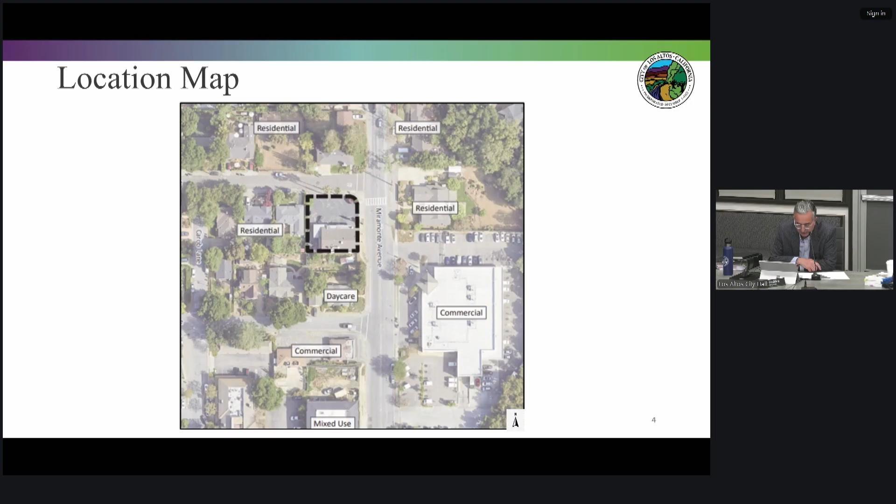The project site is approximately 0.2 acres located on the southwest corner of Lorraine Avenue and Miramonte Avenue. The site is currently developed with a 2,240 square foot single-story commercial building with landscaping and 11 surface parking spaces. The project proposes to demolish the existing commercial building and construct a 17,674 square foot mixed-use building, providing 962 square feet of commercial space with 12 residential units on the upper floors. On-site parking is provided at grade with 16 spaces, including 12 for residents and 4 for the commercial use.

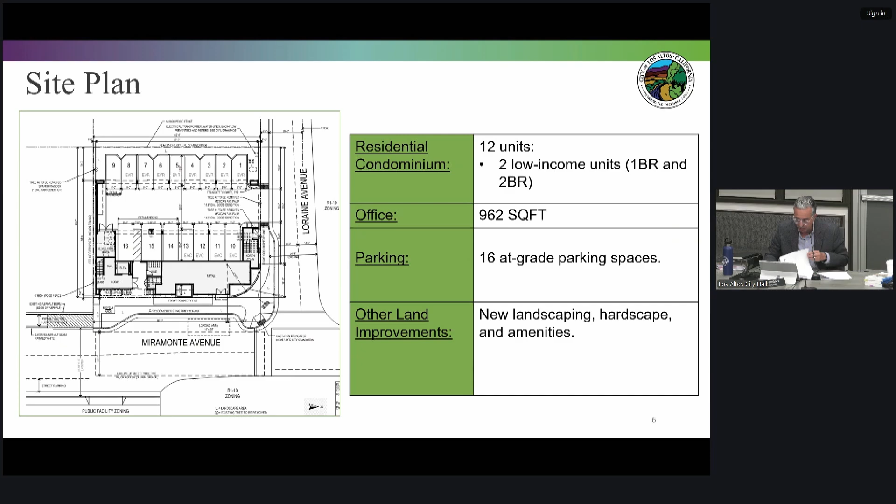The site provides pedestrian access from Miramonte and Lorraine Avenues with separate entries for residential and commercial uses, and vehicular access from Lorraine Avenue. 16 at-grade parking spaces are provided, including 8 EV-ready and 4 with active charging. Landscaping includes new trees, shrubs, and permeable pavers along both frontages with crepe myrtles, Chinese pistache, and western redbuds. Three non-protected trees will be removed and four adjacent trees preserved. The 1,824 square foot rooftop terrace features ornamental olive trees, drought-tolerant landscaping, seating areas, and a fire pit.

The project aligns with the general plan policies. It complies with the zoning standards for the CN district and the city's objective design control standards, except where modifications were made under the density bonus state law. The neighborhood designation has no set density, so the base density was calculated for a fully compliant project at 39 units per acre, or 8 dwelling units. With 2 low-income units, the project qualifies for a 50% density bonus under Government Code 65915, allowing for 4 additional units, or a total of 12 units. The density bonus report confirms compliance with state and local requirements. One concession under the ordinance allows an increase in building height from 30 feet to approximately 41 feet, and 7 waivers are requested as stated in the staff report.

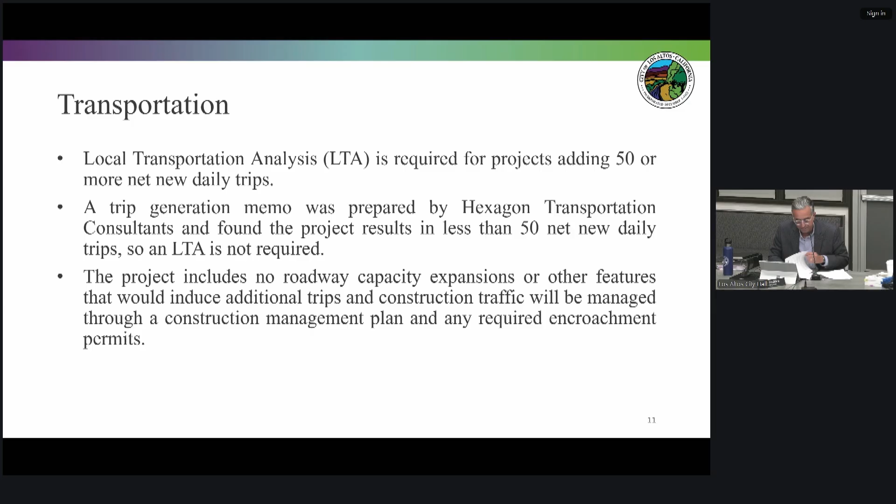It would be assigned in the planning division section, I believe. Engineering, sorry.

Staff recommends approval of the project consistent with the recommended motion. Upon commission approval, the vesting tentative map will be forwarded to council for consideration. This concludes staff's presentation. Unless there are any questions, thank you.

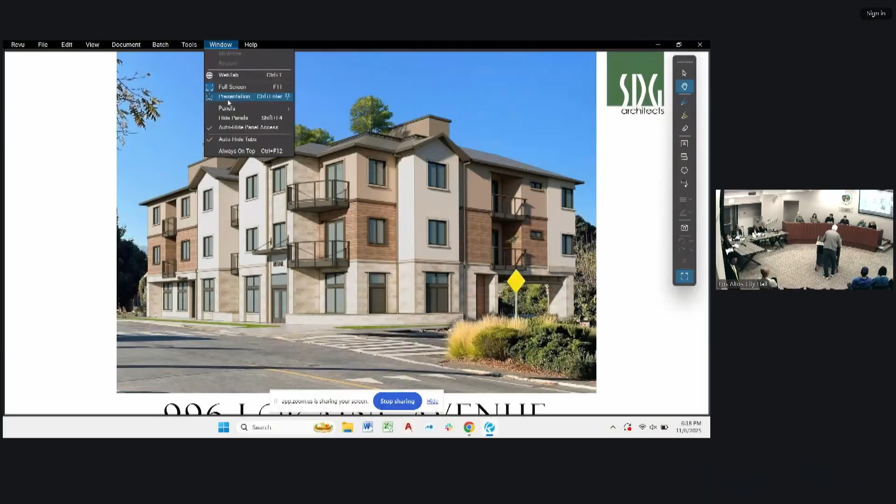Good evening. My name is Brent Randall with SDG Architects. It's been a pleasure working with Sean Gallegos as the city planner on this project. Because of his thorough presentation introducing this, my main focus will be on how this project fits in with the neighborhood and the benefits that it provides. Can we start the clock? Thank you. Okay, I hope I'm talking loud enough.

So Sean already introduced the project site to you. This just gives an overview of how Miramonte really is the main road that will be used to access the site as it comes to getting off of Foothill Expressway and getting onto it using A Street. So we do not anticipate the traffic for this project going through the neighborhood, but rather staying on Miramonte.

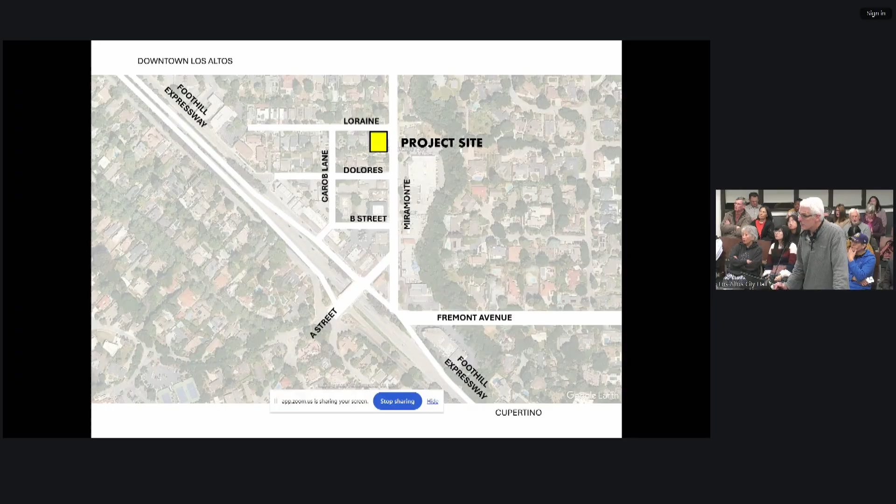So this gives a diagrammatic circulation for the site. Probably one of the biggest benefits that this project provides to the immediate neighborhood is cleaning up the sidewalk condition and the walkways to cross over Miramonte Avenue and Lorraine Avenue.

This parcel is kind of sandwiched between parcels that are in process with becoming what the road width is going to be, but isn't there just yet. So you can see that at the corner of Miramonte Avenue and Lorraine, there's a bulb-out that provides an accessible ramp and a walkway that will get you over to the other side on Miramonte. That will be a great improvement, as well as the other one that takes you across the street to 1491 Miramonte.

This parcel is the last one that's connected with the commercial neighborhood zone before it turns completely into residential. The property to the south, 991 Dolores, is actually a Montessori school, designated commercial. And then there's a house above it to the west, 982 Lorraine.

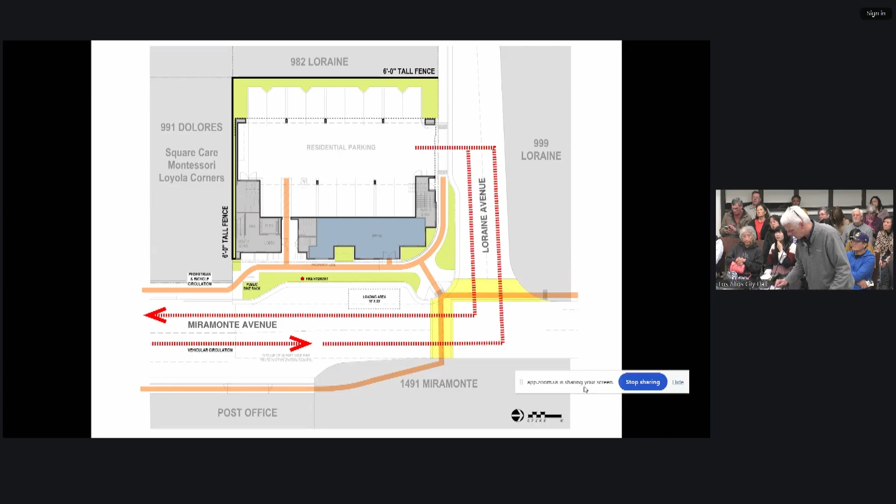What's going on here? Okay. So I just wanted to highlight some of the attributes of the building itself.

The city municipal code requires that the building have an identifiable base, middle, and top. This building provides a stone veneer with precast glass, called GFRC, glass fiber reinforced concrete trim, that will offer a very smooth finish and cap off the stone. Then on the second floor, we provided a wood-looking siding that should provide some nice earth tones that would blend in with the residential. And then on the top, we have the mansard roof and the gables to express residential character.

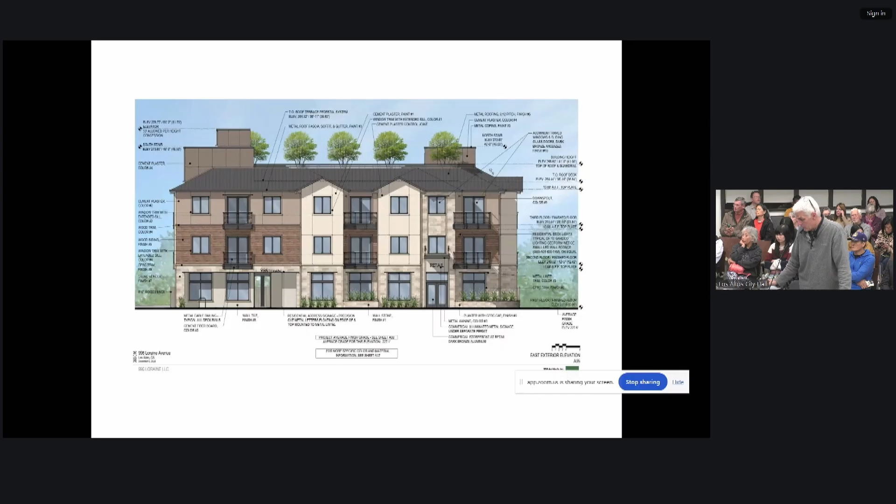Okay, then along Lorraine, that's where we have the entrance into the parking garage. This one, we just wanted to highlight that we have a 20-foot buffer between the building and the adjacent residential property. And then up on the roof, I don't know if you guys can see this arrow, but the roof terrace actually starts at this point. So it's close to 40 feet away from the property line.

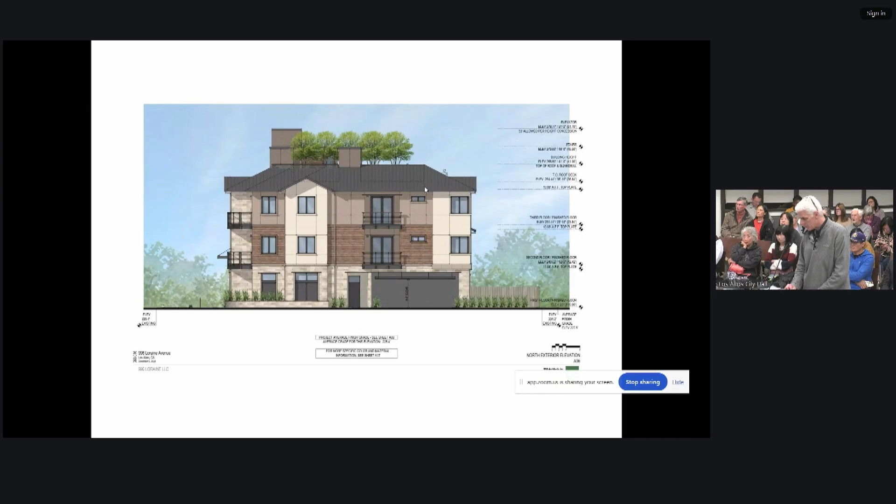And I wanted to address potential concerns with the roof terrace. A lot of effort was put into designing it so that we would minimize its presence and intrusion onto the neighborhood properties. We specifically tucked it into the mansard roof so that it has a solid wall that surrounds it.

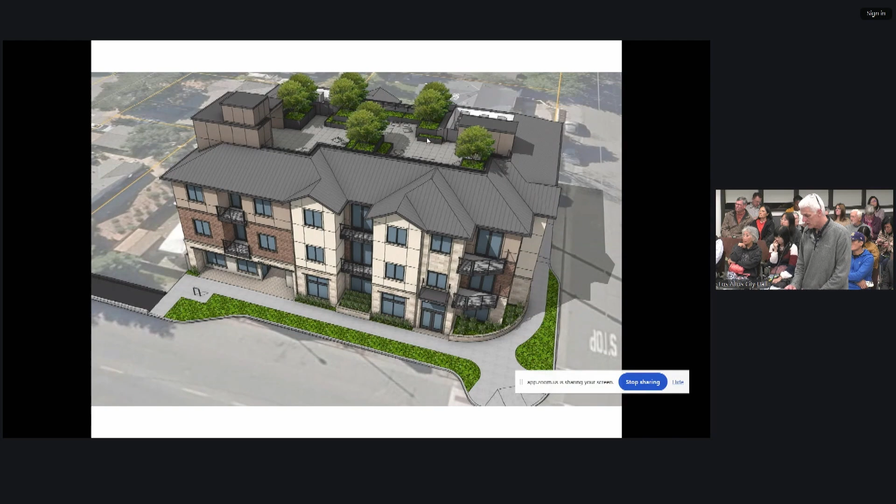In addition to that, we made sure that where we have the elevator and stair on the south, we enclosed the door area so that opening and closing, there would be no perception of that to adjacent properties. And we also used the stair tower on the north side to help shield the neighborhood from the roof terrace.

You can see with that red outline on your left, the south stair and the elevator. That provides a solid wall there. Then we use the mechanical wells and the roof and green planters extensively to further push the activities of the roof terrace away from the edge to provide privacy.

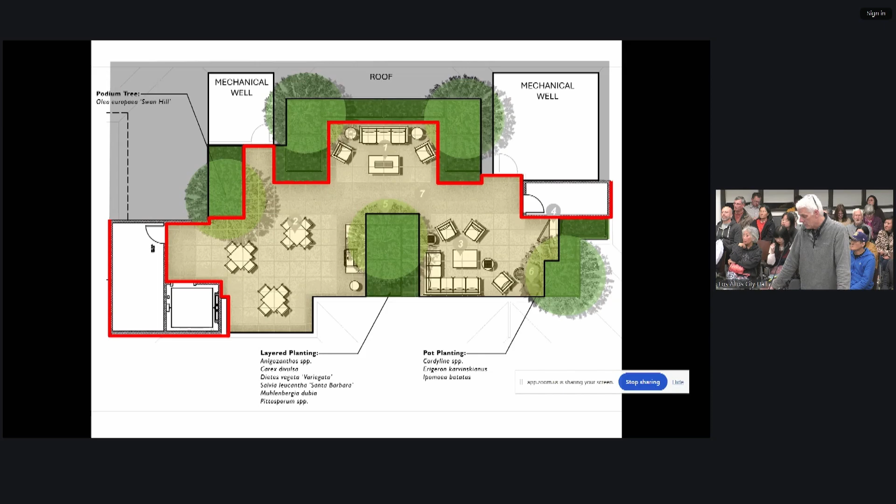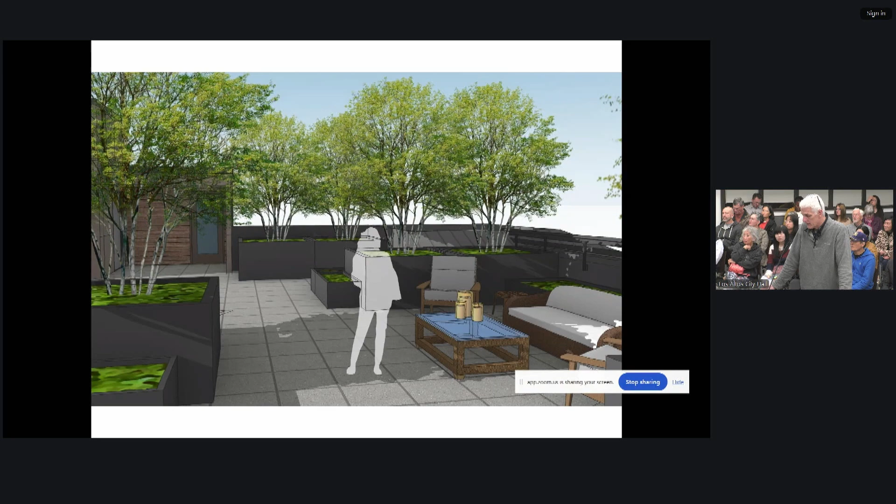And then one more: this is a view from the roof terrace looking toward the south stair, and the elevator would be all the way over on the left. You can see here the intention is that the landscaping, planters, trees, and bushes will make it a very private space and very disconnected from the adjacent parcel, so that both properties will have privacy.

So thank you for this chance to present the project, and I look forward to answering any questions.

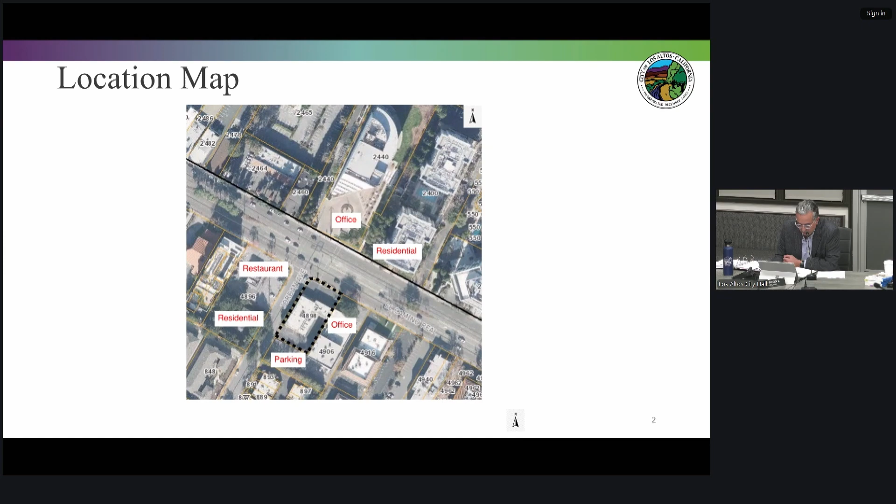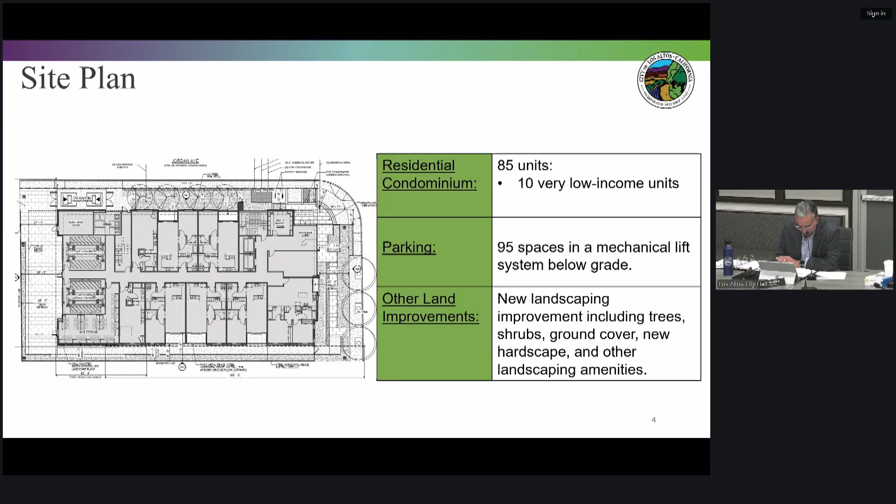The project proposes to construct an 8-story multifamily residential building with 85 dwelling units. Vehicle access to the fully underground automated parking garage is provided from Jordan Avenue. The garage will accommodate 95 vehicle spaces, including electric vehicle charging stations, along with long-term and short-term bicycle parking. The project also provides a landscaped roof deck, ground floor pedestrian amenities, and streetscape improvements along both El Camino Real and Jordan Avenue, including new sidewalks, planters, and street trees.

The residential mix includes a studio, 1-bedroom, 2-bedroom, and 3-bedroom units.

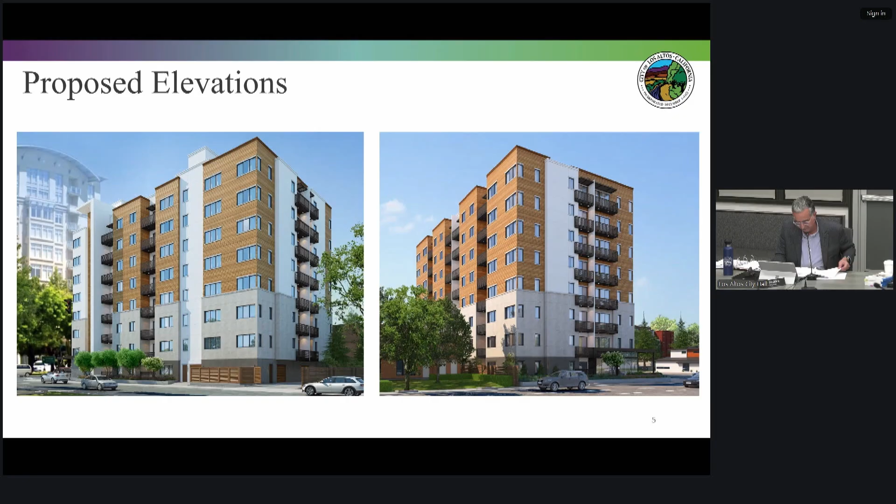The site provides pedestrian access from El Camino Real and Jordan Avenue, with main residential entries at the corner of El Camino Real, secondary access from Jordan exiting from a stairwell, and an entrance along the rear driveway entering the building adjacent to the parking spaces. Vehicle access to the underground automated garage is from Jordan, including 95 spaces, 12 EV-ready and 6 active charging stalls, plus bicycle parking.

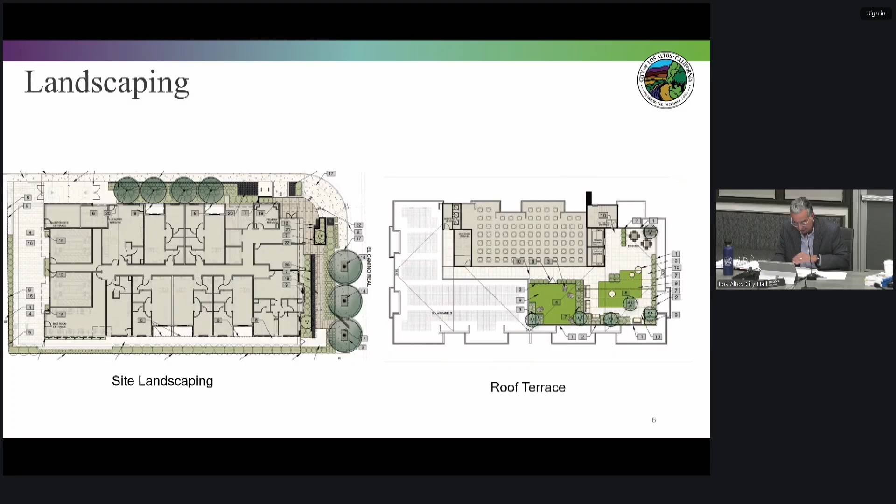Landscape features include ornamental shrubs and new trees, 3 Chinese pistache along El Camino and 4 ginkgo along Jordan Avenue. The 2,720 square foot rooftop deck offers landscape amenity spaces with golden spirit smoke trees, drought-tolerant plantings, seating, and shaded gathering areas. The project aligns with the general plan policies, complies with the zoning standards of the CT district, and the city's objective design control standards.

The thoroughfare commercial CT designation has no fixed residential density, so the base density was calculated for a fully compliant project at 50 units per acre, or 50 units on the project site. With 10 very low income units, 20% of the base, the project qualified for a 50% density bonus, adding 25 units. An additional 20% density bonus was provided for exceeding affordability requirements, adding 10 more units, for a total of 85 units. The density report confirms compliance with state and local requirements and includes the requested waivers.

No concessions are requested at this time. 16 waivers are proposed to modify standards that would otherwise preclude the project, allowing the full permitted density and efficient inclusion of affordable units.

The project is expected to generate a local transportation analysis, completed because the project exceeds 50 net new daily trips under the city's VMT policy.

My little thing that I prepared is wrong. I don't know—a transportation analysis was determined, and the applicant can speak to that, I'm sorry.

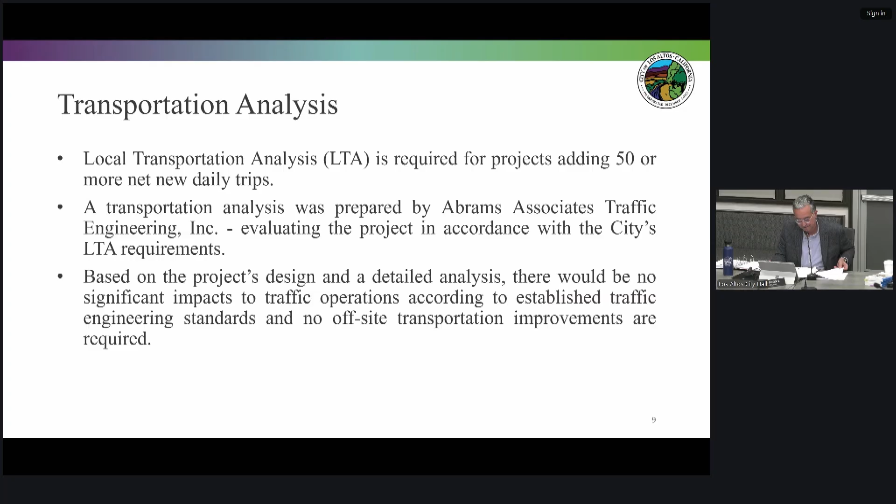Based on the project design and detailed analysis, there would be no significant impacts on traffic operations according to established traffic engineering standards, and no off-site transportation improvements are required. Staff recommends approval of the project consistent with the recommended motion. Upon commission approval, the vesting tentative parcel map application will be moved forward to council for consideration. This concludes staff's presentation.

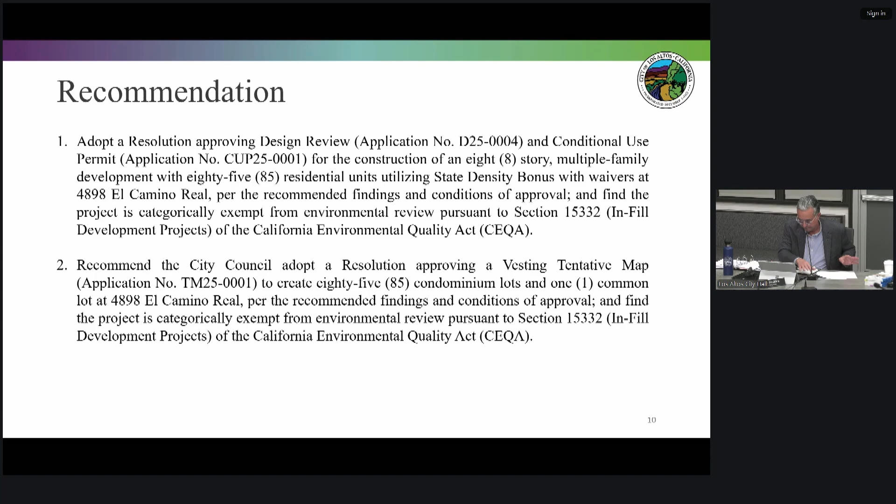Thank you. Do you need help connecting to display something? Sean, I don't know what the process is for them connecting. They do connect to Zoom or something. It should pop up. Is my screen visible? Is it on? Oh, it's on. Great, well, no, it's not presenting yet. It says I'm sharing my screen here. Oh, it just takes a little while.

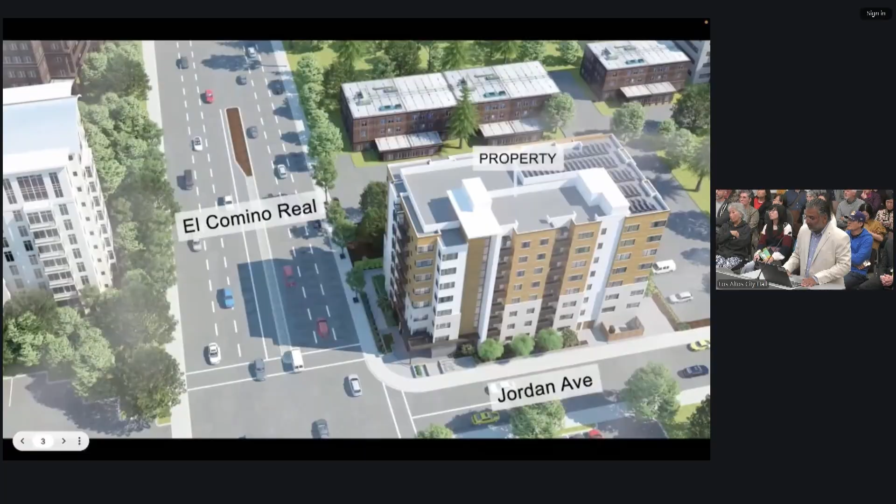Here's a quick overview of the project. The project as proposed is going to be 2 stories shorter than the building right across the street, the Avalon Apartments. I have known people who have lived there. They're beautiful apartments, and our units are units that Los Altos community and residents would be proud to live in, with respect to the spaciousness of those units—studios, 1 bedrooms and 2 bedrooms—as planned.

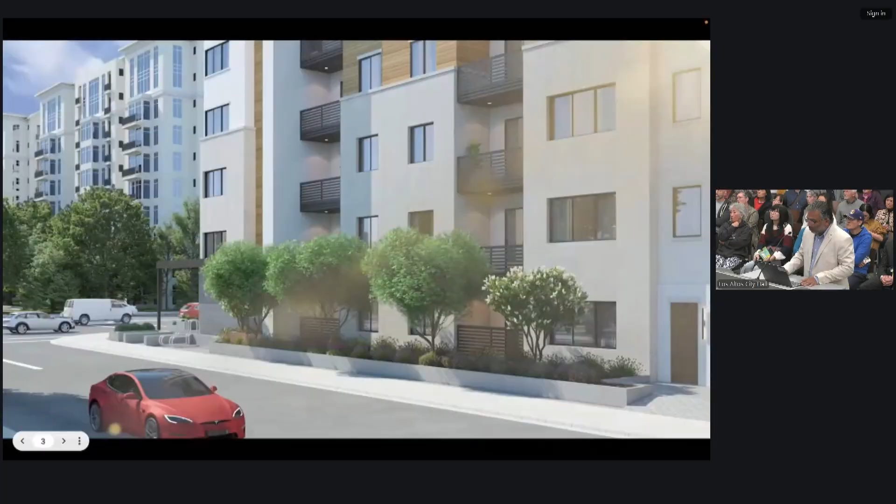As staff already pointed out, there are a lot of improvements to the sidewalk and other features being planned. But I'm going to talk a little bit about the automated puzzle parking system, which is a state-of-the-art system that will support 95 spots, even though in this project we were by code required to provide nothing. But I believe it is the right thing to do. It's designed for 3.2 times the peak load capacity when both elevators are working, and 1.6 times when just one of them is working during maintenance.

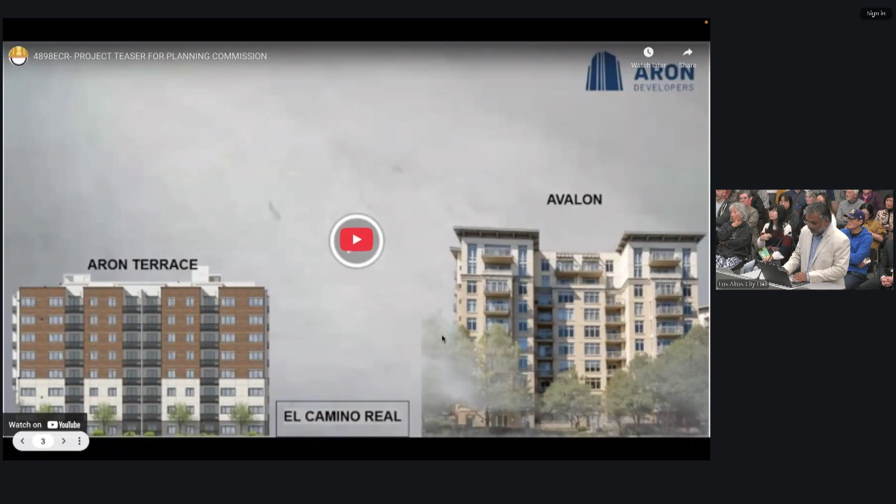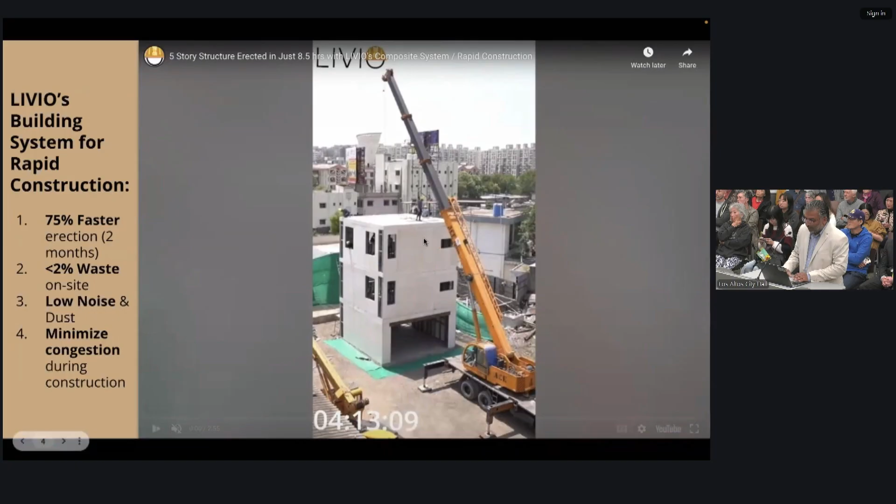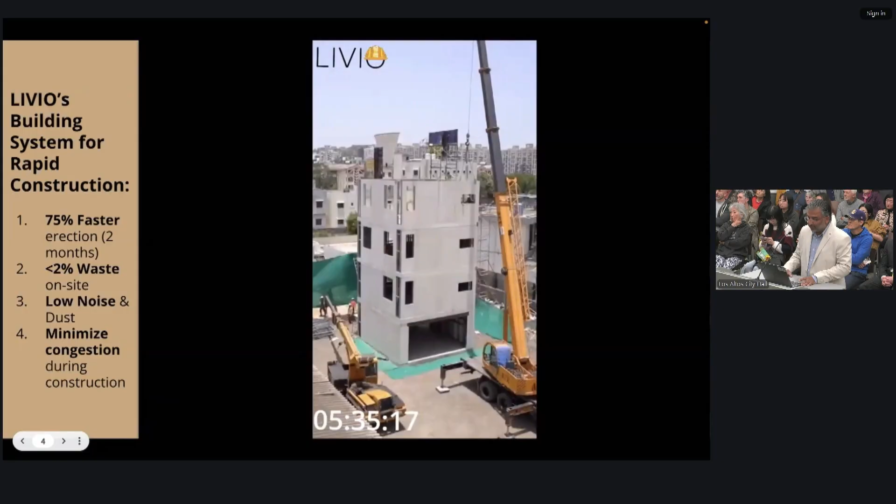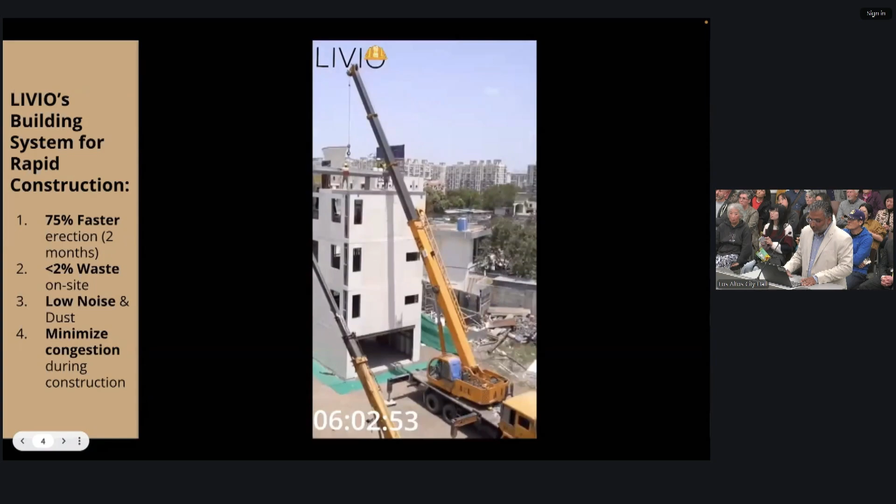I also want to talk about our building methodology. We would be building using Livio's building system for rapid construction. These are pre-assembled building panels, which enable 75% faster construction in framing, plumbing, electrical, insulation, interior sheathing, exterior elements, rigid insulation, waterproofing, and finished facade systems, while reducing waste dramatically. It also reduces congestion because they are just-in-time delivered.

In this case, what you're seeing is a 5-story building going up in 8 hours. In our case, we expect our project to be erected in 2 months—the whole vertical construction in 2 months—and then the finishing to continue after that.

Incorporating BMR units is a key part of our projects and furthers the goal of cities' RHNA objectives and commitments. As part of that, 10 BMR units are well dispersed across all unit types—2 bedrooms, 1 bedrooms, and studios—and also on all floors.

Some of the other things taken into account include a well thought through trash pickup system. Each floor has chutes, and we've reviewed with Mission Trail and their staff for deliverability, sitting in their offices deliberating, planning, and improving it based on that so far. Also, how mail would be delivered by USPS and other agencies—there are allocations for that.

In the back of the building, right over here, there are 2 parallel, completely redundant puzzle parking elevators, where only one was sufficient from a technical capability perspective. Even then, we would have had 1.6 times the capacity of parking. But with these 2, we built redundancy for maintenance and so on.

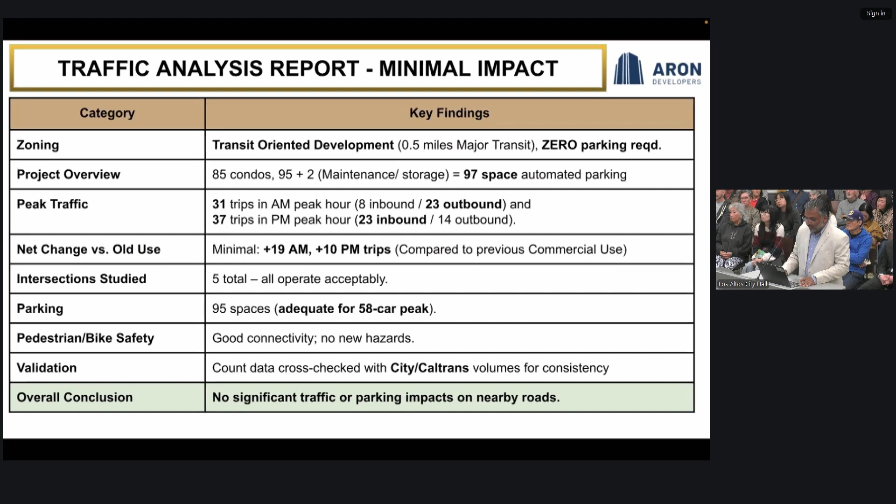If we could please have my consultant Max speak on the automated puzzle system. They're not present—are they allowed to speak remotely? No. Zoom? You have to be present. Okay, I'll talk on his behalf then.

We're very excited about the automated puzzle parking system we're putting in. It's a really state-of-the-art learning system. Let me start with a couple of highlights. We are putting in 2 parallel redundant bays, and one would have been completely sufficient.

The demand per the traffic report is 23 cars per hour. However, with both bays and both elevators perfectly working, we would be able to handle 74 cars per hour, which is 3.2 times the demand. And with one elevator down for maintenance or any other activity, 37 cars per hour, or 1.6 times the demand, would still be available.

For system uptime efficiency, the consultant and parking company we're working with have an efficiency of 99.19% uptime. The average retrieval time is 180 seconds, best case 48 seconds, and the average parking time is also around 180 seconds and so on. So these are the figures they provide us.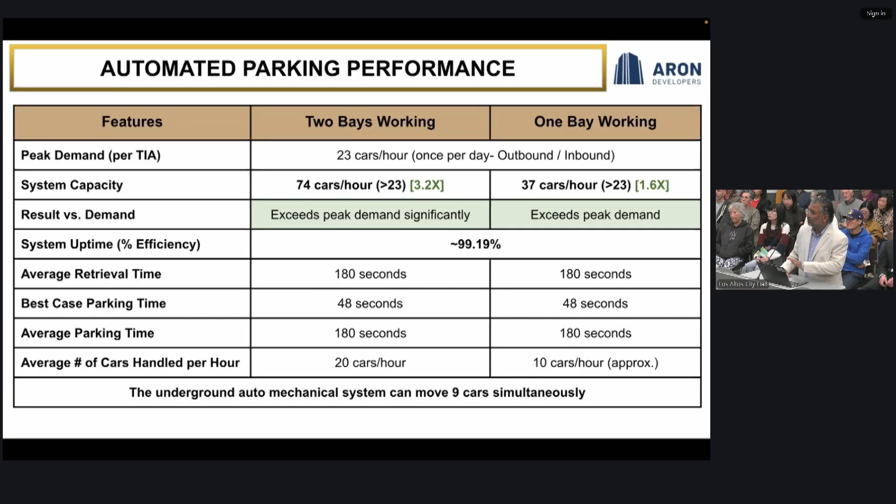This is a slide I wanted them to present because this is their actual data. I'm going to skip through it, but their actual numbers are actually much better. I'll skip through it for today.

Even though we believe that with such a highly advanced, efficient, redundant system there will be no issues—sorry, you're out of time, but you will have a 5-minute rebuttal period, so maybe you could pick up at that point.

Sure, if that's okay. I would leave the presentation. You can just leave it there. Thank you so much for the opportunity. I appreciate it. No problem.

All right, so we're going to go to questions for staff or the applicant. Any questions from anybody?

Go ahead. Yeah, I think what you had shown—if you could maybe go through that, because what I'm trying to figure out is what happens when there's 5 cars coming in and 5 cars leaving, and there's a UPS truck and an Amazon truck—what does that look like? And where are people waiting in the building, how are they lining up? I just need to know, on that map, how people are going to line up. Sure, I'm presenting—there it is.

So all systems, engineering systems, would be designed based on the demand. In this case, the total capacity available of the parking system is 74, which is basically a time of less than a minute per car. So even when we go to hotels and call valet, or pick out a car, it takes significantly more time than that.

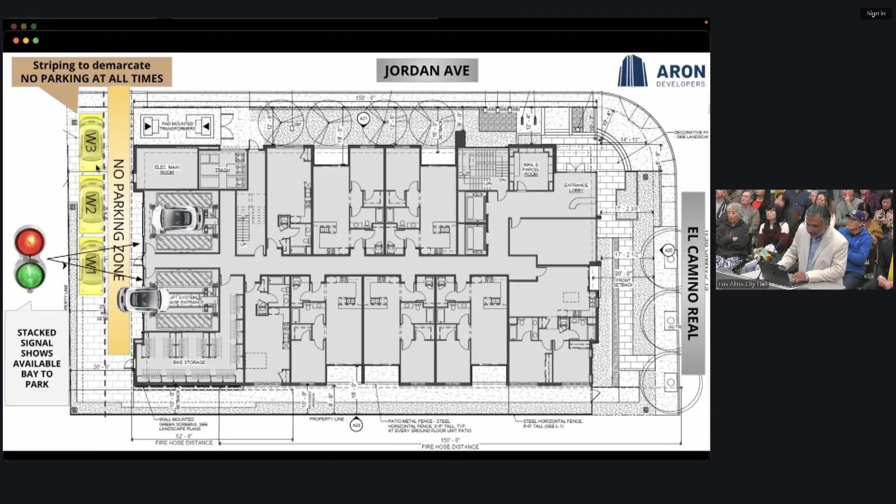Can you zoom at all? It may not be possible with the presentation software, but the 3 yellow spots—sorry to interrupt—that's where you would wait if an elevator were not available. Correct. All exiting cars will exit out this way. This is a no parking area, and all exiting cars will always exit out this way.

So if I lived in this building, if I walk down and go in that room where the tray is, I swipe something on an app, and then my car will be brought up. But then what if someone's coming in at the same time?

There are 2 ways to access the system. The first is a mobile app. You can be up in your room, taking a shower or whatever, and call the car, and it would come to you, ready for you to take out. You can also set a timer or an alarm, saying you want your car available at 6:37 a.m., and it would be available to you, facing outwards, at 6:37 a.m. in the bay. That's the first way to interact with the system.

And the second way to interact with the system would be through a kiosk, which would be available. You would go to the kiosk and press to retrieve your car. Essentially, there's a code, and you can retrieve your car.

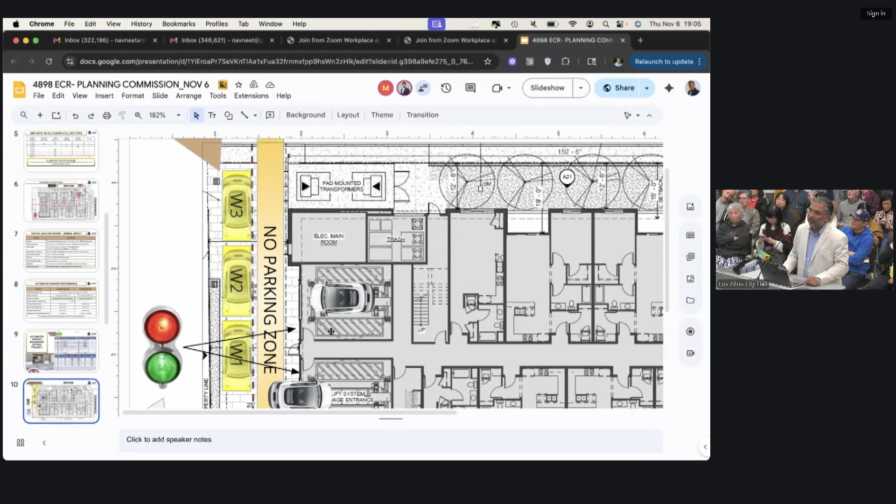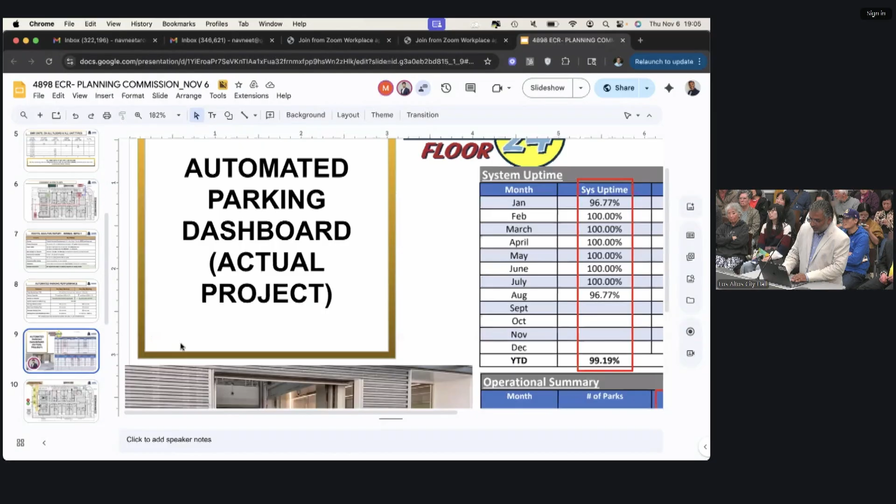Okay, one more question. If it takes 3 minutes to bring the car up once I scan the app—I thought I saw 180 seconds? Yes, that is correct. The marketing, conservative numbers given to us are 180 seconds. 180 is the average retrieval time. And the best case retrieval time is 48 seconds.

When both systems are working, the system is also a learning system. It knows that, say, Nav typically leaves early morning at 5 a.m. or typically leaves at 6 p.m. At any point, while cars are being parked in and going out, nine cars can be moved inside the system automatically, moved in a puzzle way to bring Nav's car, because he typically comes at 6:37 a.m. and needs it. So the system is learning, just like software systems, arranging the cars based on patterns it has, and based on patterns that people have explicitly set, like saying they like to go to work at 8:30 in the morning.

This is probably a stupid question, but what happens if something breaks in the system and you can't get your car out? No, it won't—that's why we have redundancy built into it.

To serve a building like this, most developers, to save money, would put in only one elevator, because from a capacity standpoint, even with one elevator, the system would have 1.6 times the capacity needed to serve the building based on all available data. However, just to cover the scenario of maintenance and downtime—because we all know elevators have downtimes—there is a parallel system. These are completely parallel systems, just like a hotel has 2 elevators and one can go down while you still use the other. Again, we'll be surpassing the capacity needs or demand of the building.

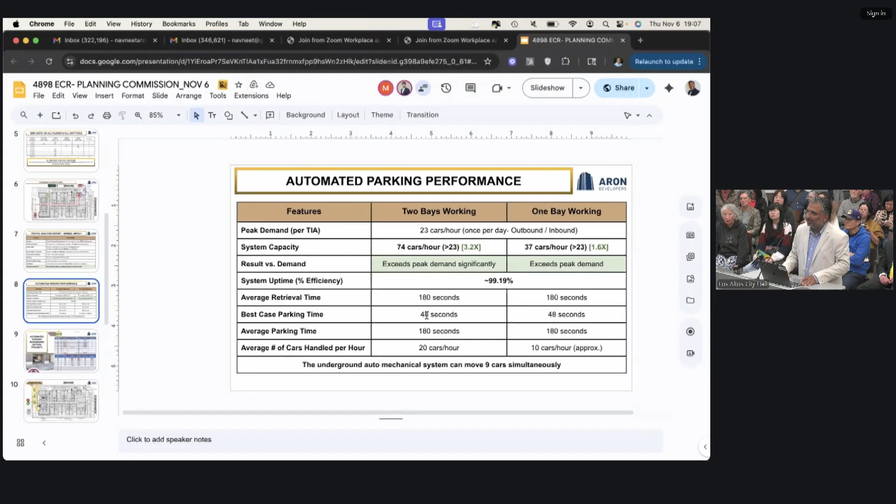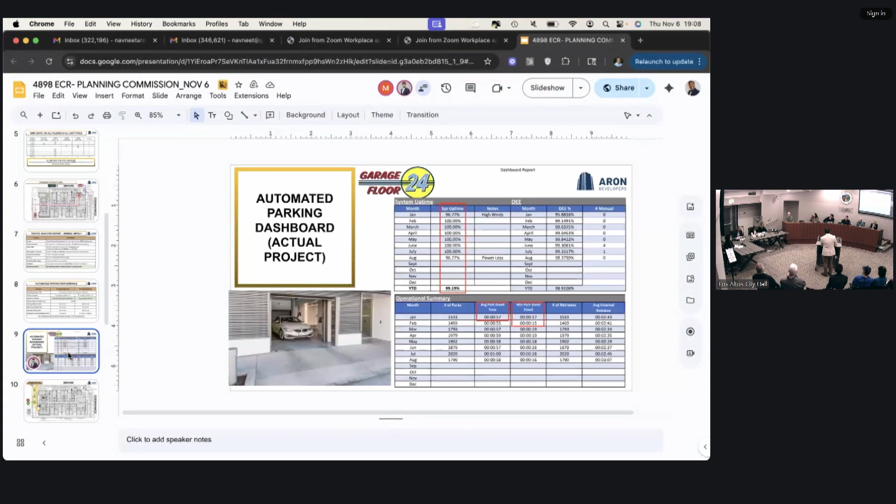I could also add, looking at the operations plan prepared for this site, it references auto cycle times—how quickly things can be moved. It indicates that park and grab on the same level is 62 seconds, park and grab at a different level is 82 seconds, and dump and retrieve is 139 seconds. On average, each lift can grab 37.5 vehicles per hour per lift.

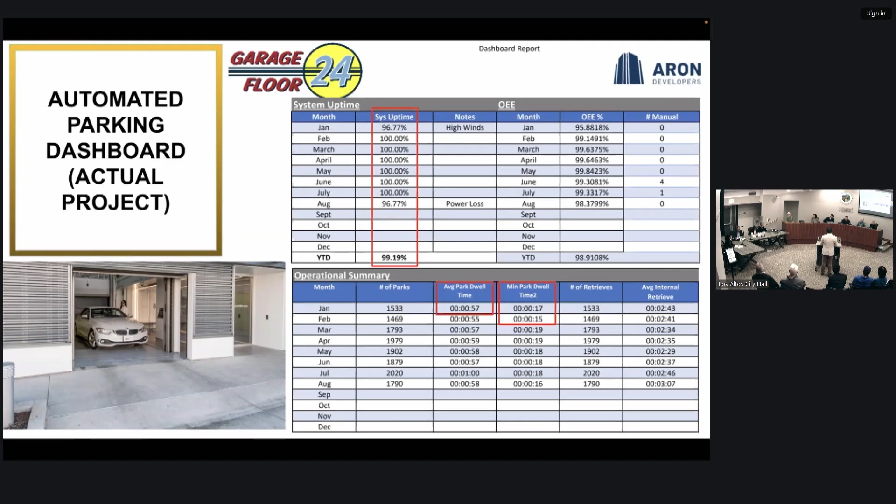And there's additional information, but I thought that was maybe relevant for you.

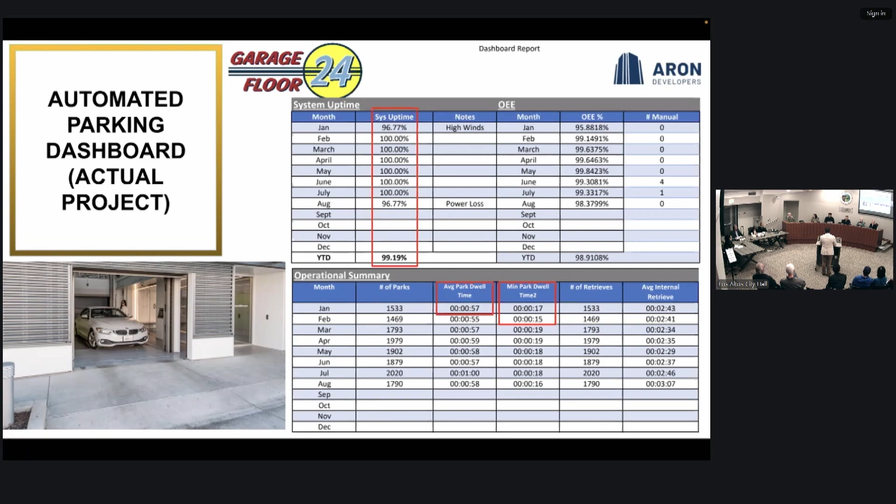Okay, since we're on the topic, could you bring back up that diagram? Because you mentioned you could call your car to be there at 6:30 a.m. So let's say I oversleep and I don't go out there. What happens to the car that's blocking it?

So it's like in the software world, you have the front cache and then the hard drive memory and so on. It's similar to that. Again, I'm not a designer of the system, but I've been learning about many different parking systems myself. The way I understand it, if you don't take your car within a certain amount of time, it goes back into the buffer, like a few minutes or so. Yeah, a couple minutes. So while it's sitting there, that light is red, and no one can get in there.

Okay. And then what do guests do who visit? Let's say a friend comes over, can they park in these elevators? How do they know how to do that?

It's basically a code invitation from the app that you can have, kind of like a condo with an underground parking garage. The resident gives them the code, they can get into the elevator, and then it goes into some guest parking. It doesn't matter guest parking or not, because it's all underground and nobody has access to it anyway. Since it's a guest, most likely the guest will leave soon, so it'll apply some logic on where to park it for fast retrieval. It'll tell them, if you want to get your car out, enter code 123 or whatever.

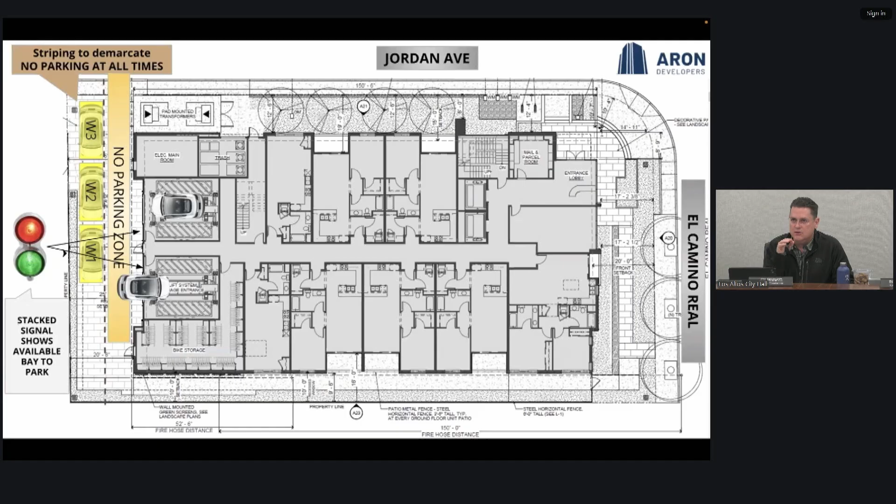Okay, that's helpful. And then also on this diagram, while we were talking about it, you had asked about UPS deliveries or whatever. Are they just going to be blocking the street? Is there street parking all along Jordan right there, or?

There is street parking available today along Jordan. All of that is available.

Okay, yeah. So Amazon deliveries are where it says mail van 1, is that correct? Mail van 1 or mail van 2 can also be used, but we believe mail van 1 will be used most of the time because it is right next to the mail room.

Okay, and is that, like, while the Amazon truck's there, is that blocking traffic or is it off-street parking?

Please, no comments, we heard you. We've seen your comments, that's why we're asking these questions. Yeah, please.

Whatever street parking is available would be available to the cars which are parked there or the UPS truck, just like they do it on public roads today. And during that time, of course, they would not be parking in any red spots or anything which is required by code or law not to be parked at.

And other than that, there's also capacity in the area marked as mail van 2. We would work with USPS for their small trucks to be able to bring in, park, and serve the property from there as well. This is an area which can be used for parking for a long period of time, potentially for loading, unloading, etc.

Okay, and there's no loading zone created on Jordan, is that correct? No. So originally the concept was to have the loading zone in that particular area where it says mail van.

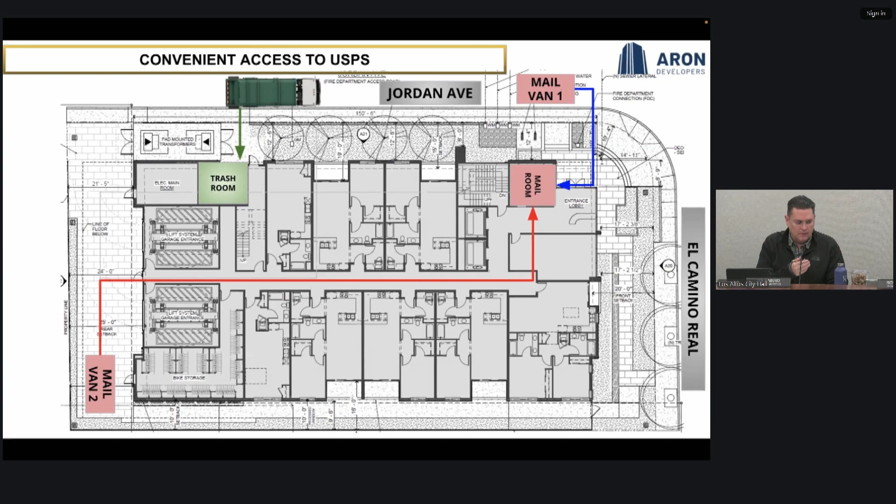But any further parking - one thing nobody's mentioned is there's a stoplight at the corner of Jordan and El Camino. So this is all good and fine, but by the way, I've been down Jordan by the site in the last 5 days, probably once a day at least, and every day there have been 3 cars parked on the curb by the site on Jordan. So where you're anticipating other parking is going to come, I don't understand. You're going to be back from the curb a little bit, but if you've got a red light and no parking, and you've got your Amazon truck, where's it going? You can't park there.

It's going to go around the block. So that's where, per Jeff's suggestion, there's enough length available along the property on Jordan where there could be a dedicated marked, striped loading zone, which would basically not be used by anybody for parking as is done today, and therefore would enable it to serve all the use cases. I think if you can get the city to do that, it would be a real positive for the issue.

I should clarify too that those vehicles parking there are coming from off-site construction sites like 5150. There are constraints on where they're allowed to park, so they're parking further down El Camino Real and onto Jordan. And that day we were there, there was nobody parked except for you and me, so I think it varies. But as we saw in the Loyola Corners project, there was a little indent - I don't know who has rights over that, or if staff could look at a solution to the delivery problem. I think that would be helpful.

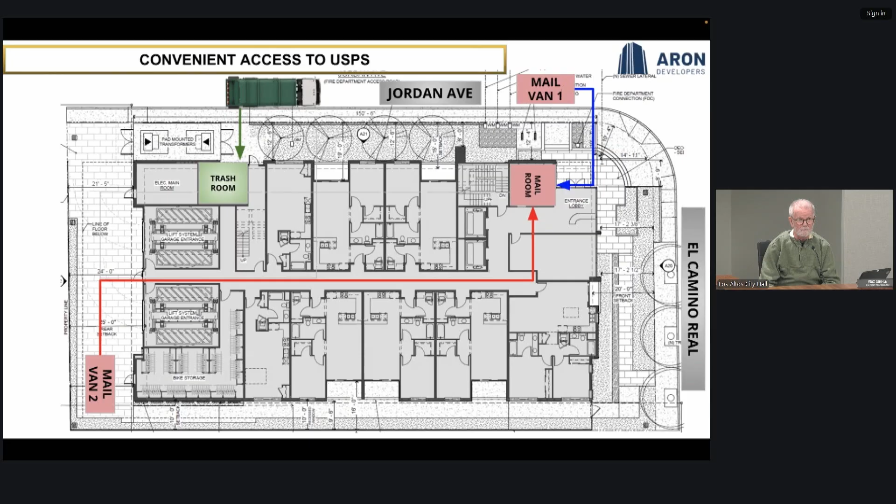This means going to local legislators' offices and having them fight with Caltrans, because Caltrans owns El Camino Real. The solution might be to get parking, say a yellow strip along El Camino Real and not on Jordan, because El Camino Real is a major street, and that's usually not a problem. I'm in the process of doing that - it is possible. The city has absolutely nothing to say about it, so don't even bother them, okay?

Because you will have to go to someone like Senator Becker - there's somebody in his office who actually deals with Caltrans about this. They've been doing this in Palo Alto, and I'm in the process of getting this started with my people, because we go from 150 feet to 35 feet for deliveries. That's a challenge. Okay, so that's a recommendation, a pro tip if you will. Thank you. Okay, the second thing is the parking system itself - I'm just curious.

My question is sort of following up on Joe's: what happens when the Wi-Fi goes down? It sounds wonderful, but there's that. And number two, how long has this whiz-bang system been in operation? What's their track record? Are you at the bleeding cutting edge of this technology, or is it well established?

I'd like to get more information about that. So as part of working on this project, we have been talking to 4 different puzzle parking systems. They all offer a variety of different features and capabilities. I want to call out that puzzle parking systems and automated parking systems are not that common in the Bay Area.

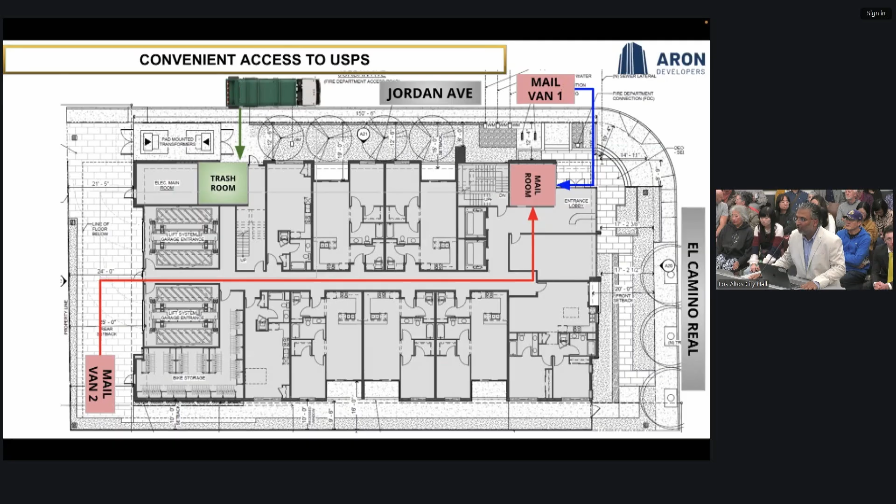I'm very confident in the system being used. All our analysis has been around comparing through several metrics, not just price, but retrieval times, up times, incidental issues, maintenance times, downtimes, lots of different metrics that we are evaluating across all 4 vendors. Our decision is based on choosing the most capable system, and still assuming that there will be downtimes and mechanical failures, and having enough redundancy built into the system.

We live in Silicon Valley, and I think in most cases we set the tone for the rest of the world with respect to how humanity progresses forward. We're just being in line with it right now. We're not doing extraordinary stuff with the system, not trying to put in alpha or beta quality software. This is several million dollars of parking system, and it comes with a lot of thought behind it.

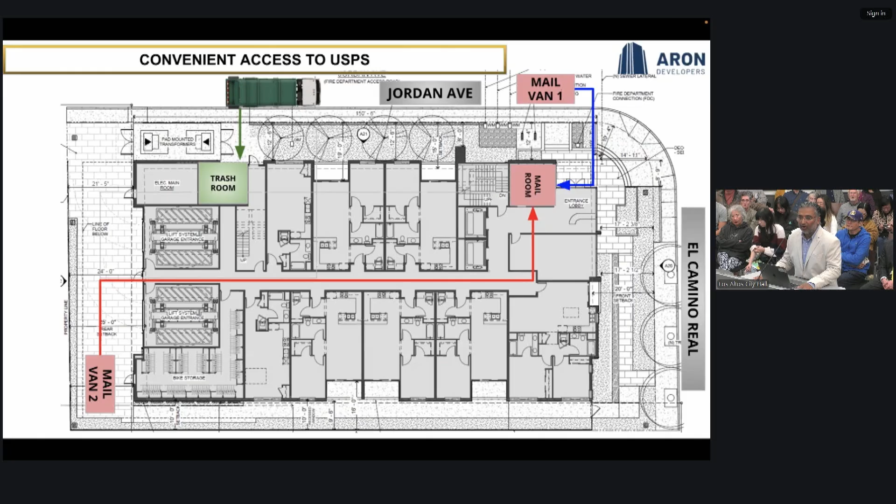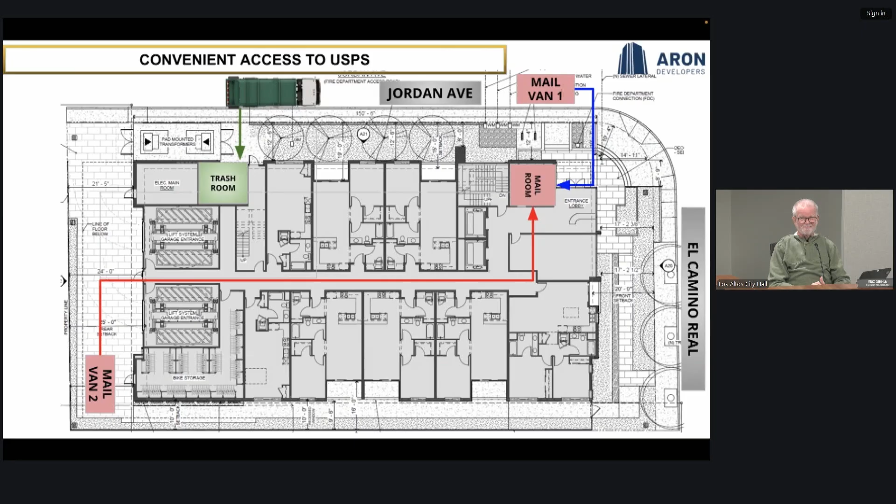So the system has been decided. We haven't signed the contract yet, but we are pretty much there. That's the one being referred to. Any more parking related questions, please go ahead.

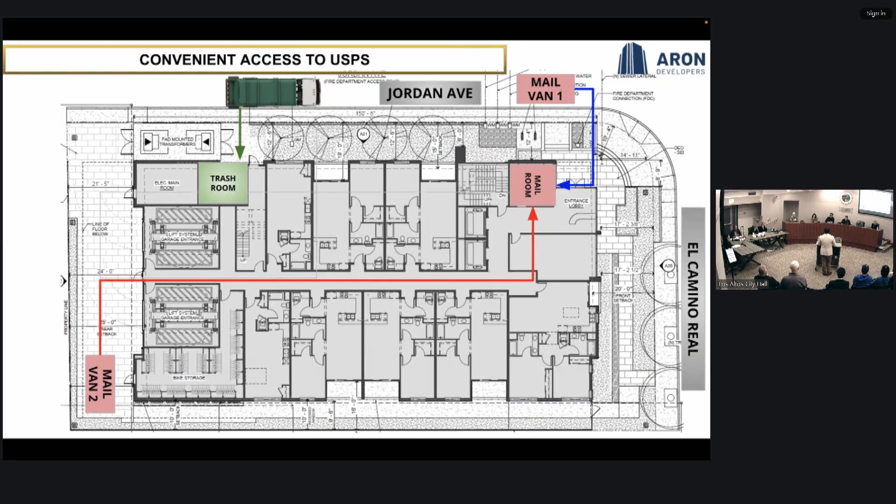I still don't totally get it, but let me walk through it. You come in off of Jordan Ave and pull into that bay, let's call it Bay 1, the one on the bottom. Then you step out of your car and the lift takes it down, since there are 2 floors of parking, correct? And then somebody else can pull in right after, a few seconds behind, onto another platform to turn. The light turns green and anybody else can pull right behind.

And then when you want your car, you call it somehow and get into the car, and the car reverses orientation. That is correct, and both of the bays can be in or out. Okay, I think I just needed clarification on that. Yes. Is there a puzzle parking setup like this in Silicon Valley already?

This particular company does not have an installation in Silicon Valley, but they have one in LA. There are others too, in Los Altos, on First Street I believe, and in Millbrae, I know of some of them.

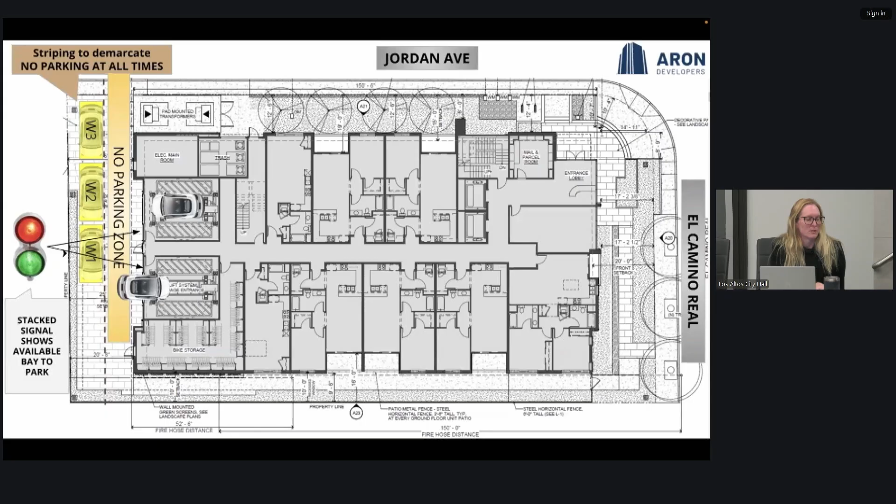Stephanie confirmed that about a year ago, she and Mr. Zorns visited a similar automated parking puzzle concept at an office building in Burlingame. There's also another one of this automated puzzle system going in downtown Los Altos.

Are we good on parking? Other questions from anybody? I had another: regarding the construction method you have, are there limitations in terms of the architecture, or does it offer the same capability as standard construction? This might be a question for the architect.

It offers full architectural flexibility. There is no limitation on that, it's just a way to expedite construction because equivalent materials are used to pre-assemble parts of the building in such a way that it expedites construction on site. There are no architectural limitations.

So the units themselves are not prefab. No, it's just the panels on the outside that can be articulated differently, but there's no limitations with those materials. So it's primarily a rough building system, it doesn't do the finishes. The finishes are all done on site after the building is watertight, essentially. Waterproofing is all connected on site, and after that, all the finishing is completed on site.

The panel system is also your company? That is correct, I don't know if you're aware, I am the founder and CEO of Livio Building Systems. And what is the tallest building that has been built with this system? So far it's a 5-story building, but we have other projects in the works which are 8-story and 13-story as well.

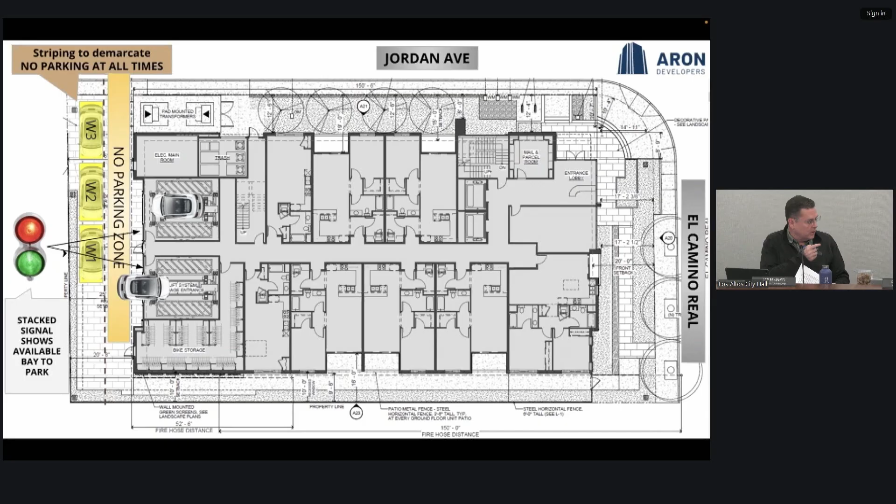Other questions, go ahead Susan. When we met, you mentioned this was going to be a rental building, but it's actually being asked to be a condo building. What is your latest thinking on that? Because rental units would be terrific to have, particularly below market rate ones. Thank you.

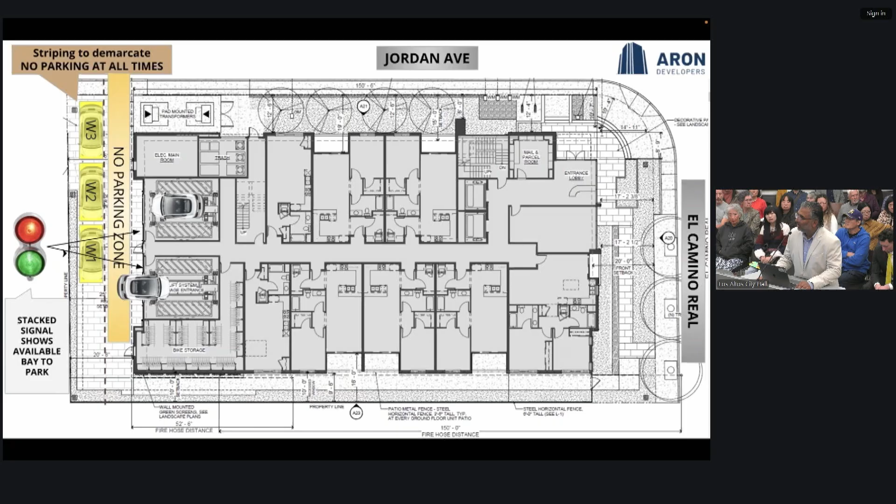I love this location, that's why we originally went into it. We want to hold it for as long as possible. Our intention was, and I've been completely transparent with staff, consultants, you, and the community, with our investors, that we intend to hold this asset. We almost went bankrupt on this project once due to factors completely outside our control, so in order to protect ourselves from such a calamity, we wanted the ability to exit if needed. That's why this building is being fully mapped as condos. Depending on prevailing interest rates, cap rates, and other external factors, we may be required to sell a few units for market reasons only. Otherwise, the intention is to have the entire building held as part of the ownership.

Thank you, other questions on this side? First of all, this is awesome, I love your automated parking. This is... oh sorry, questions?

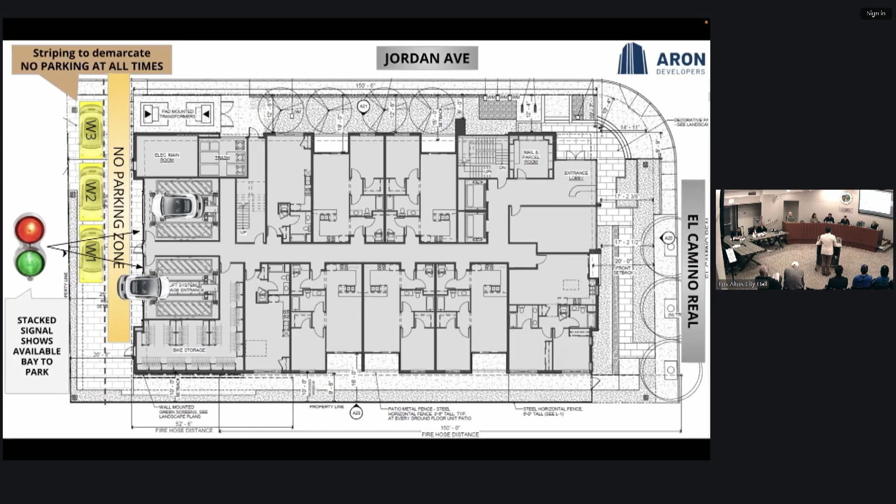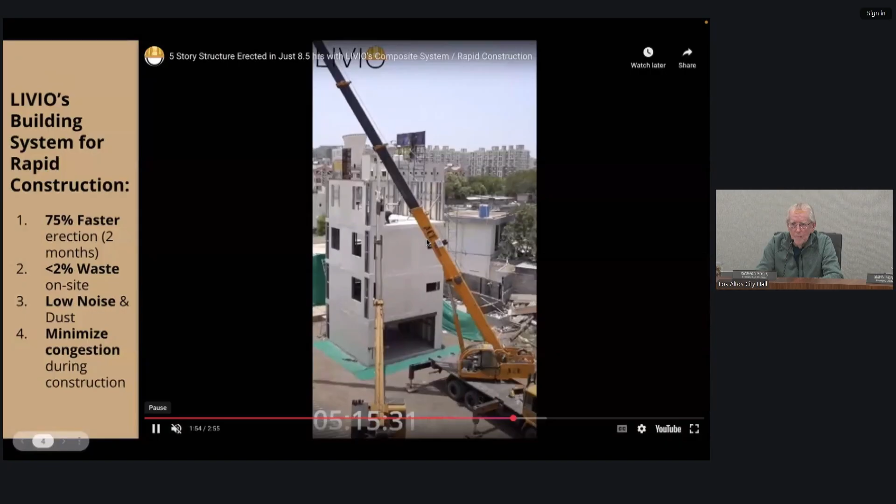Yes, tell me about the construction of the panels, do you need a big crane or whatever? You have limited area here, it's a small site, so are you going to need to have your crane in the street lifting the panels up? That goes back to parking and traffic, it's just, how are you going to put it up?

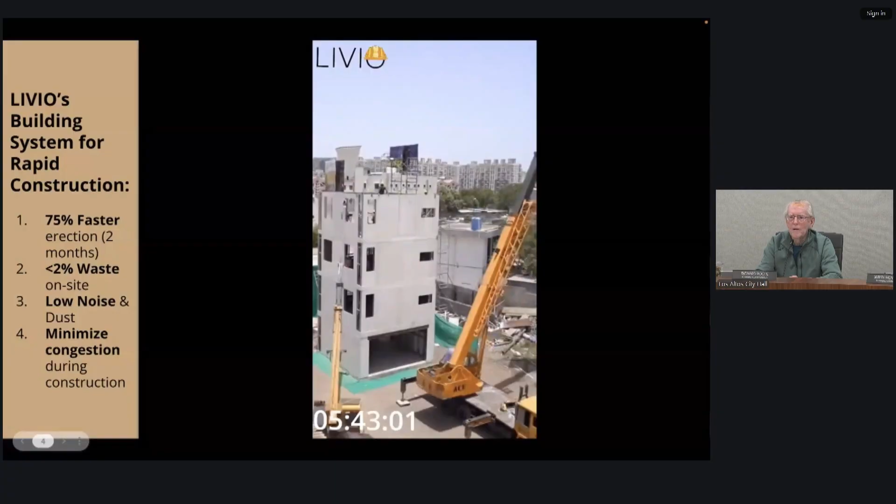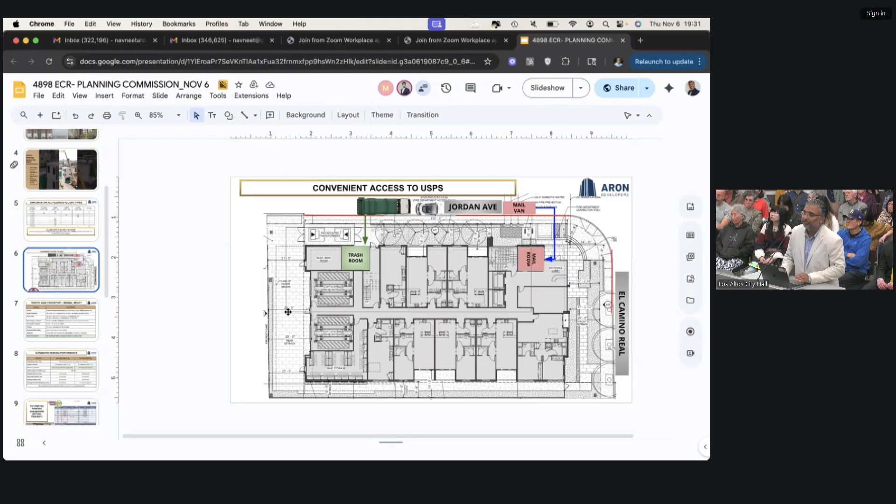Great, thank you. Is the land behind the property available? I think it's a parking lot currently, is that correct? It's a driveway. So it's not available? No, it's not available. Okay, so hard stop at the property line? Yes.

Other questions down here? Because I have a few, if no one else has any questions.

Sean, I wanted to call your attention to page 281 in the report, impact number 4. When I first read this, it said there were 3 access driveways, and I was confused by that. I think it's the traffic report, so I'm not actually sure who prepared it, but that's not correct, right? There's only one access. Sorry, I'll give you a chance to get to the page, 281, impact number 4.

What's the particular question about that? Well, the proposed project would have 3 access driveways. And that's not correct. That's okay, I thought so. I was like, I'm not seeing the other 2 access driveways. So there's only one access driveway. That's what I thought. Thank you. Unless somehow they're counting the main driveway and the 2 access points into the garage - that's the only way I could assume that's what they meant. The transportation consultant, Abram Associates, is here if you have questions too. No, I think it was just a typo, but I just wanted to double check it because I couldn't find them.

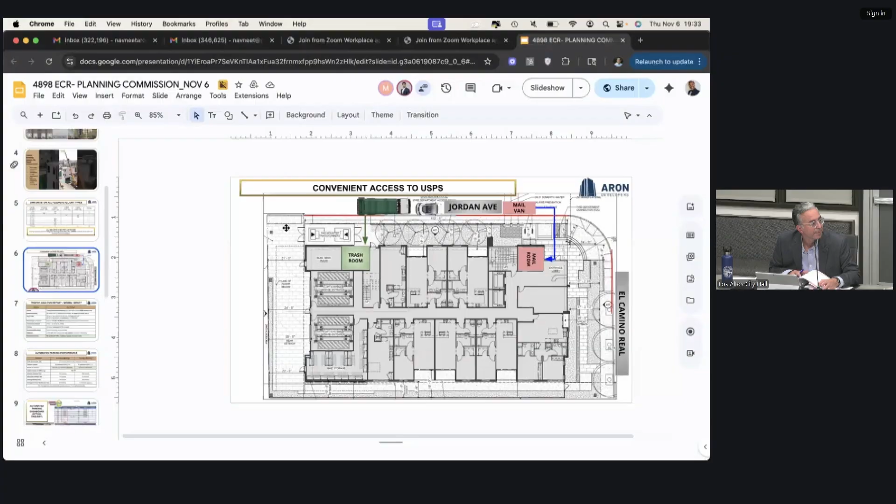So the traffic report was prepared for the applicant, and then the city reviewed the traffic report after that. Is that correct? Yes, there were quite a few revisions to get it to a point where it was consistent with all the city's policies. I had a great conversation with Stephanie earlier today where she talked about how the calculations were done, because with a new project across the street with 30-something units and 80-something units on the other side, we have 120-ish new residences going into a very small section of land. So you've analyzed this and concluded the impact was at an acceptable level - I think it was like a 12-second delay, if I remember correctly from earlier today. But the city has concluded it's all okay, is that correct? Correct, yes. Thank you, because I know many residents were addressing the parking, traffic, and congestion concerns, and I wanted to make sure we covered that.

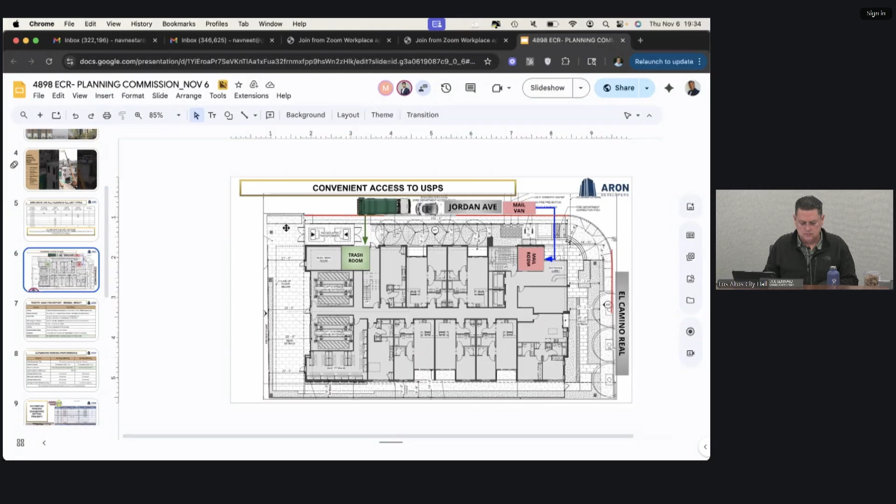I had one more question for Mr. Aron. When we met on site, you talked about a backup power system for the parking system. I didn't see that in the plans anywhere - is it a diesel generator, is it batteries? What are you thinking? We are exploring both solutions. In the previous version of the project, when we went through the construction drawings, we had a diesel generator based system previously engineered, so we're open to that idea. I think it'll be better to have a battery bank based system, it's just more environmentally friendly. So we're exploring both from a construction drawing standpoint. But you are committing that there will be something for backup. Yes. Okay, I just wanted to get that on the record.

I should clarify too - if this is regards to the battery backup for the below grade garage, it is defined as a battery backup system in the plan set. Oh, it's on there somewhere? Yes, and it's required by building code. It's in the basement floor plan, sheet A10, it references a battery backup system. Okay, I'll take your word for it, I didn't see it when I was going through, so that's perfect.

Thank you, Sean. Please go ahead. Can I ask about the bike parking? It sounds like there's Class A parking that's both below grade, like underneath, correct? And then also the bicycle parking - can you just talk a little bit more about that?

Yeah, the main portion of the bicycle parking, there's a large bicycle room at grade at the back corner of the building, adjacent to the parking space we've been talking about for the trucks. That handles the bulk of the bicycle parking to meet the city's criteria, though we're not sure there'll be that many bikes. The parking system is also set up so that somebody can come in on their bike, a rack system comes up instead of a car, and your bike can be parked in the underground system as well. So it meets the city's threshold, I believe it's 1.5 bicycles per unit, so there's about 130 bicycle parking spaces. And is there charging with those? There is now.